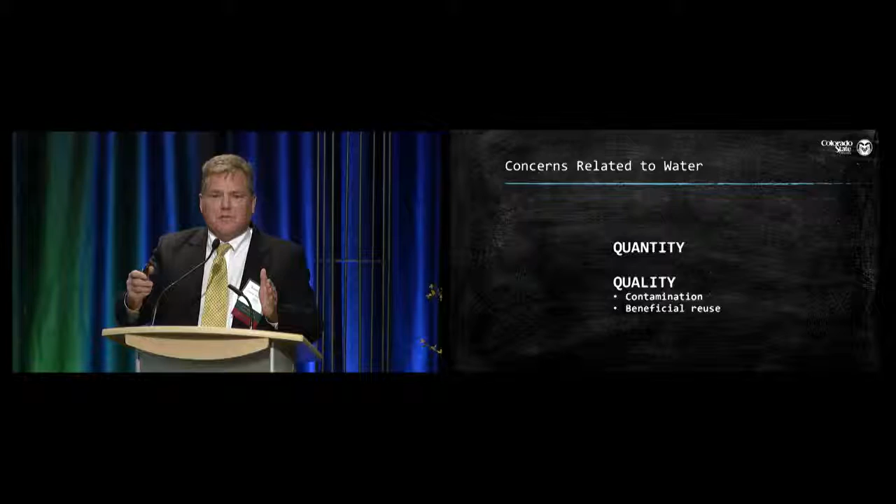But the other part of it that I think is very valuable, and we're putting a lot of effort in - and Joe will talk about this - is reusing the water. A lot of the flowback, which is the early water, versus the produced water, which I think was discussed earlier - Rebecca talked about it, that it's produced in tandem with gas and oil. A lot of it is deep well injected right now, and there's a pretty big push to not do that as much, to make beneficial use of the water, and I will talk about that.

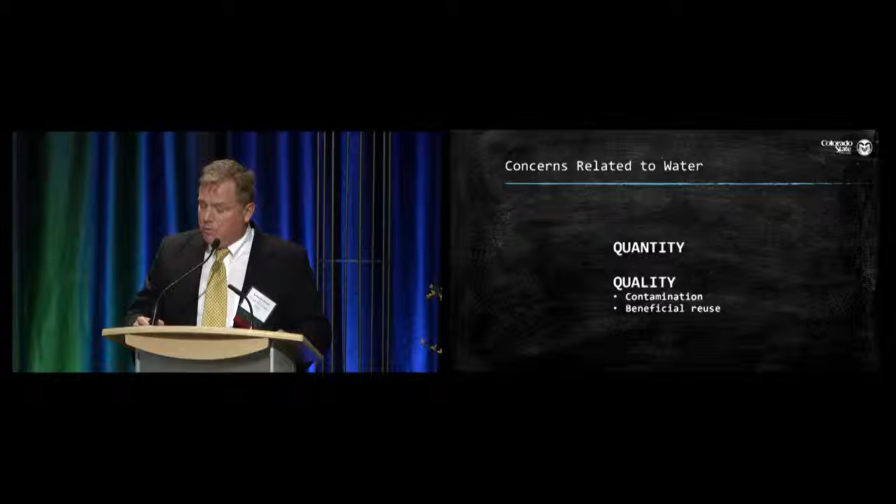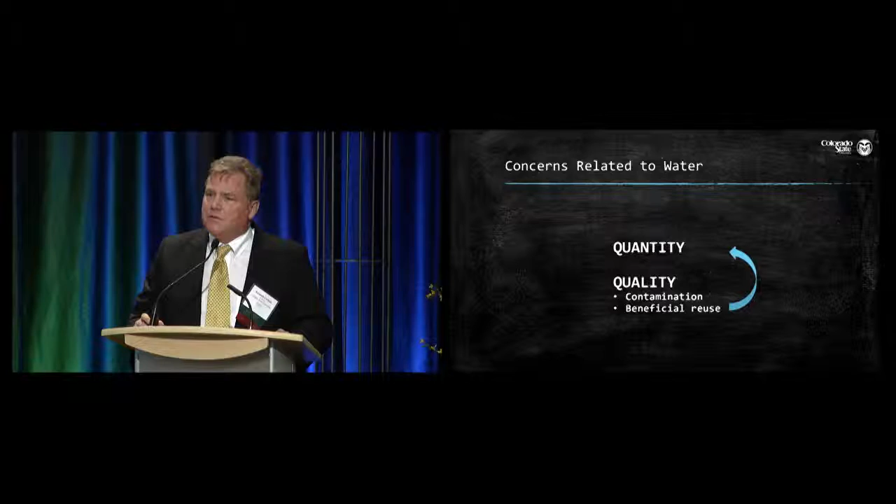And of course, if we do that, that impacts quantity, right? If we can reuse some of the water, the oil field wastewater, then we don't need as much fresh water.

I put this slide in here, and I'm not going to go through it in detail, but to remind everyone how interconnected things are - energy, water, and agriculture is what we're doing here. But agriculture can also be food, right?

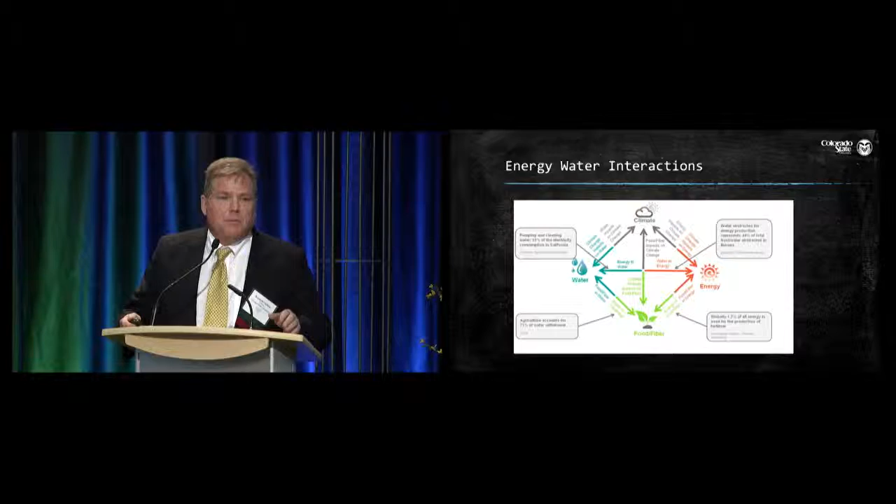We have always needed energy to produce water. In fact, one of the facts is that 20% of the electricity, the energy used in California, is for treating and transporting water. And you know, there's biofuels - there's a lot of linkages. So it's not as simple as just looking at water by itself and not including energy into that. And then recently, people have started to look at agriculture or food.

I think Rebecca cited this earlier, and so she did some of the work for me. Essentially, 0.1% - this was a study done by the Colorado Water Conservation Board, COGCC, and another organization that's eluding me right now. It says that 86% of the water is used for ag.

You can look at this in different ways. The truth is, what it says is that 86% of the water extracted is used for ag. But ag water is actually used multiple times - you irrigate, it goes through the alluvium, someone else claims the water downstream. So it's not completely apples to apples here.

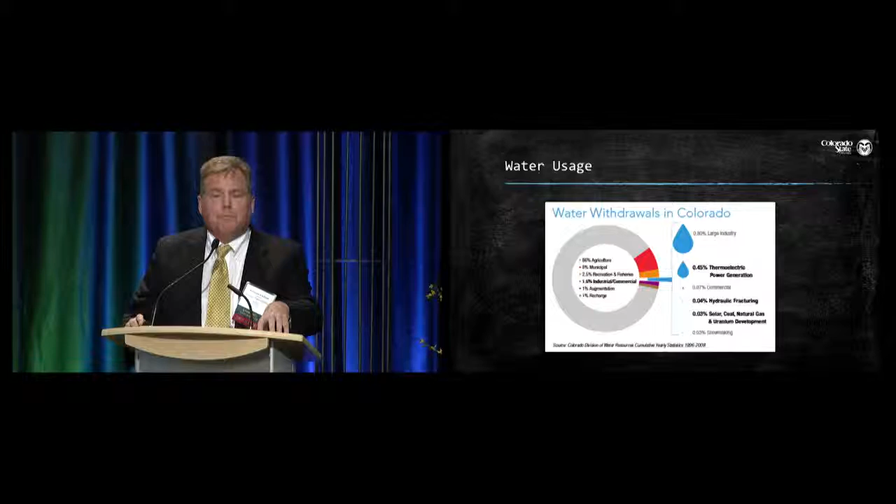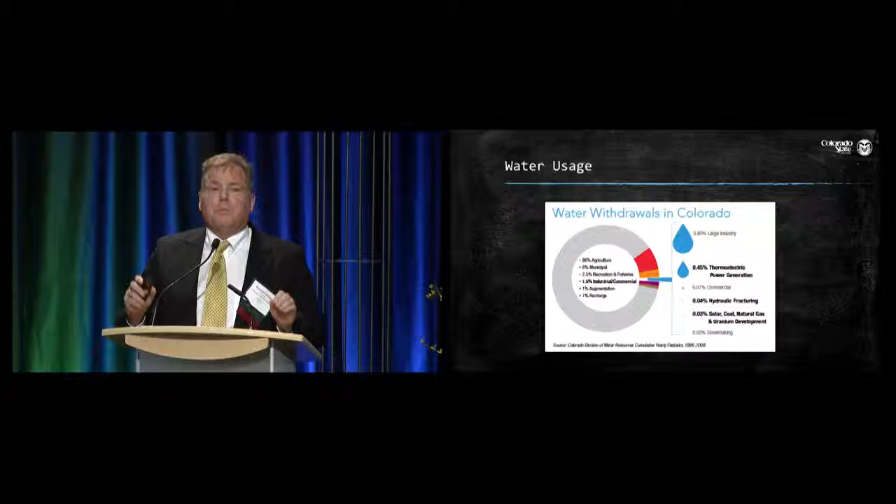And the other thing is, you have to take into account local issues - if I'm the farmer that has lost or been outbid on water that I was expecting for some other use, that doesn't make me feel better that less than 0.1% is used for hydraulic fracturing. I think Joe will talk about this too - it's still valuable. The water might be 0.1%, that's a number, but it's still a valuable resource, and a lot of effort's being put into reclaiming it.

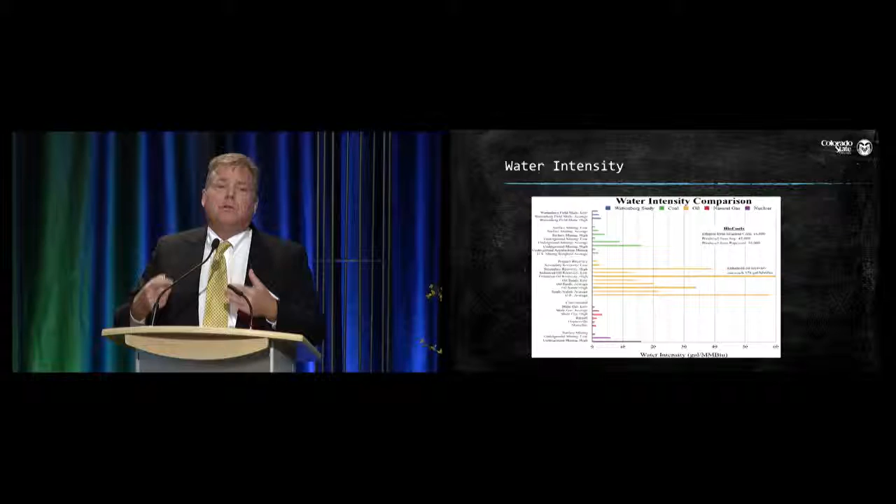I think this was covered also - this is actually the data we developed. We did this study about 3 or 4 years ago, published it, because at the time there was this discussion about 5 million gallons a well. Well, if you get more energy out of that, if you have to use less water per million BTU of energy that you reclaim, then it's probably a better deal - a more efficient use of the water. And by far the most inefficient use of water for energy is biofuels.

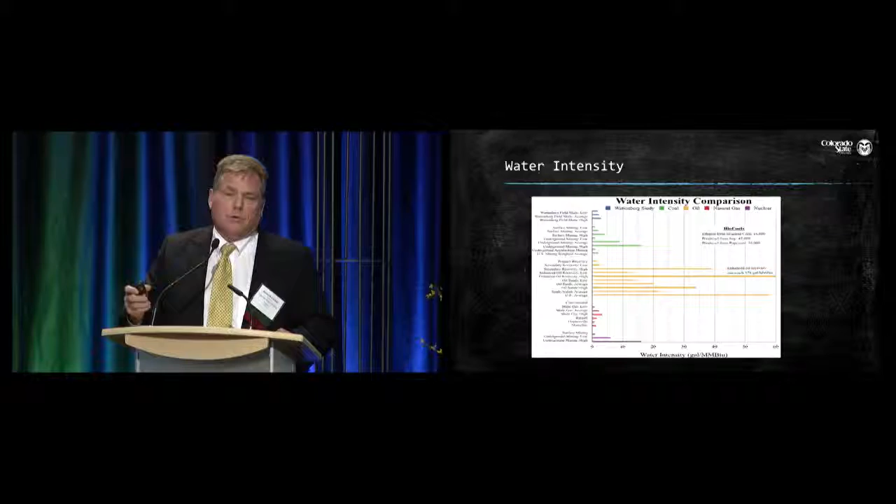First, there's freshwater acquisition, storage, and transportation. Acquisition, I think you understand - that could come from groundwater, from cities, from existing surface water rights. But storage and particularly transportation are really key aspects of the whole life cycle of water management.

Frac fluid interaction with recycled water - so if we're going to recycle water, that's one potential beneficial use for it, is to use it to frack another well. Depending on the frac fluid you're using, it might or might not be compatible with that water. So a lot more understanding needs to go into that.

Produced water management - this is the water that's come back. You've got the same sort of thing: you need to collect it, you need to store it, and you need to store it safely. And I think one of the things you maybe got from the air emissions section was that this could be a source of VOCs, possibly methane, but more VOCs.

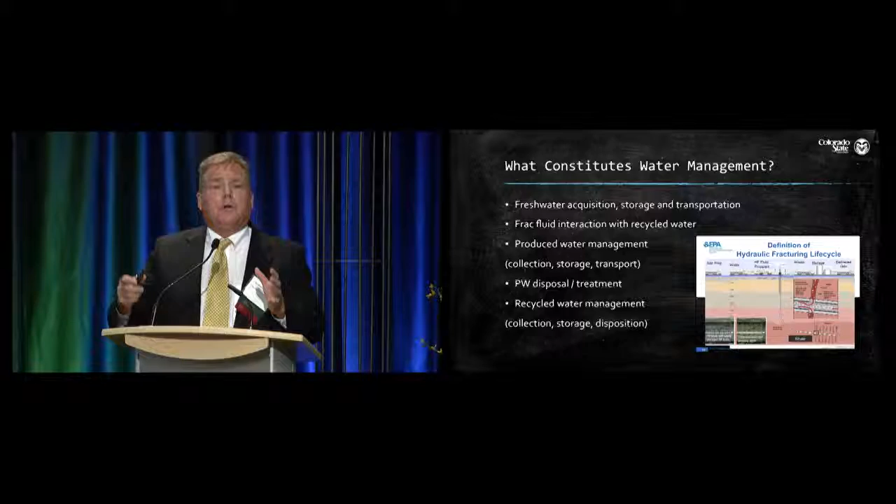Disposal or treatment, that's sort of the end. You're going to transport it somewhere, put it somewhere, or dispose of it so that it essentially ends up 10,000 feet down in a formation that you'll probably never use again. Or are we going to try to make beneficial use of it? And then there's recycled water management.

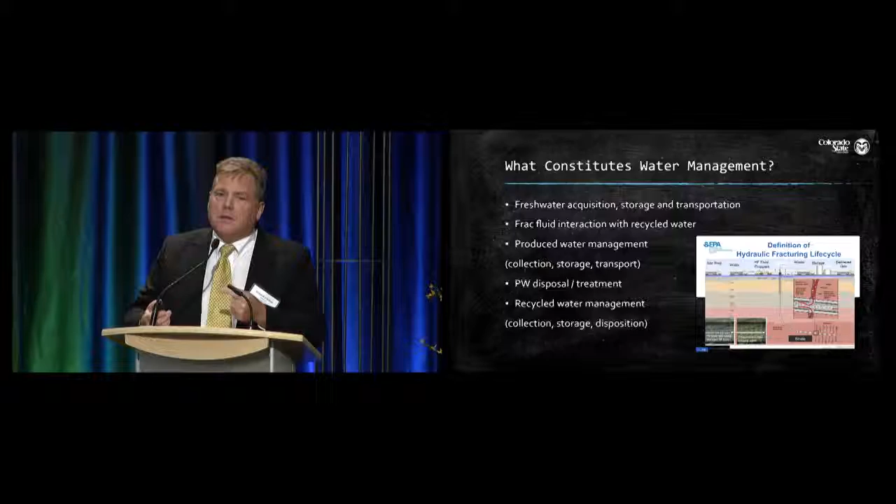So after you've taken it somewhere, let's say you choose the treatment option, you've still got to figure out how you're going to get it to this place of beneficial use. So you're back to the transportation problem. And if you throw trucking in, the costs go way up. So it's really a logistics issue.

Let me show this slide, I think it represents that. I'm not going to go into this in detail, but this is some modeling we've been doing over the last few years to try to isolate the individual variables that are important in this whole water management strategy. So there's things like the quality of the fresh water, the volume of the fresh water, the transportation costs, and then what's the water quality needed for fracking?

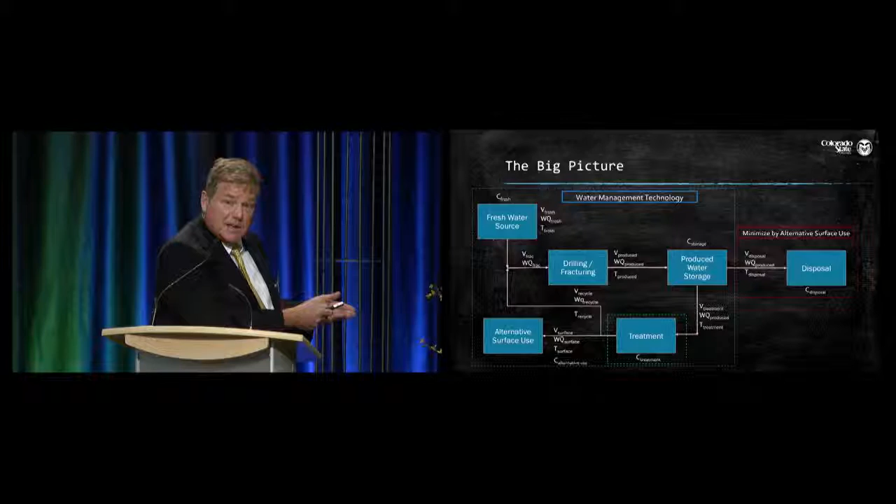It goes through drilling and fracturing. We need to store it. We then either send it to disposal, or if we choose treatment, we need to know the volume that we're going to get. We need to be able to predict volumes. We need to be able to predict what the water quality is that's coming into our treatment facility. And then we have to decide what's the best beneficial use.

Is it going to be an alternative surface use? And so what could that be? Well, that could be agriculture. That could be irrigation. That could be other industries that can use somewhat of an impaired water that are local. But when we run these models, the key is to minimize transportation, particularly trucking transportation, because that's where the cost is.

So I like to think of this as, what would be best? If we could just go from where we are now to the ultimate solution, what would we like to see? Well, what we'd like to see is, we have an oil field here, it's producing water, we're collecting it in a tank, it's bermed.

It's contained, so there aren't going to be spills. And then it's treated on site cost effectively. Has to be cost effective. And then there is a beneficial use for the water in the proximity of where the water was generated. And so in this sort of ideal picture, I would say it's maybe used for irrigation, or maybe put in a stream for downstream use.

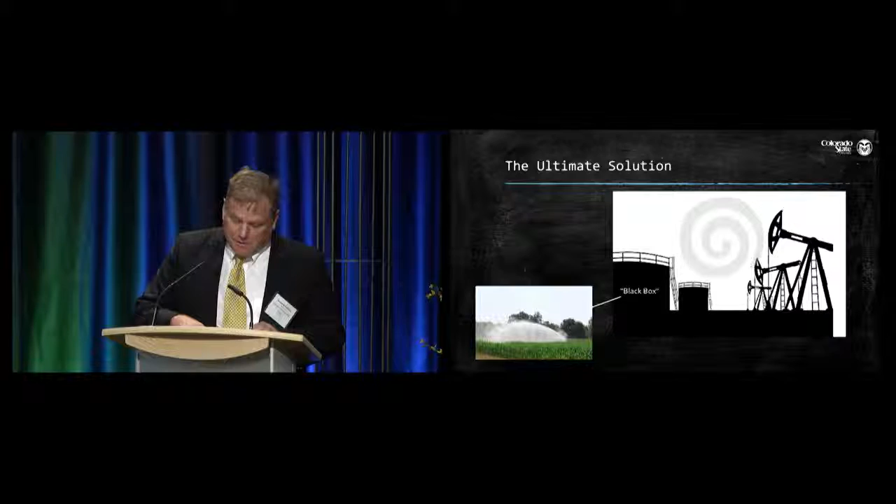Now, we're not there, okay, but that is where I think a lot of people in industry I talk to are headed, and particularly with lower oil prices, this is a very cost-sensitive thing. So the challenge to engineers and researchers is to drive the cost down for the logistics of getting this kind of solution accomplished.

This is the same plot again, and we're talking about some of these. I was going to mention the treatment box here. So leading into treatment, we need to know how much water is being produced. I don't know whether everybody's aware of this, but this is a typical decline curve, or type curve, of both oil and water. And they don't necessarily have the same slope, but they have the same shape.

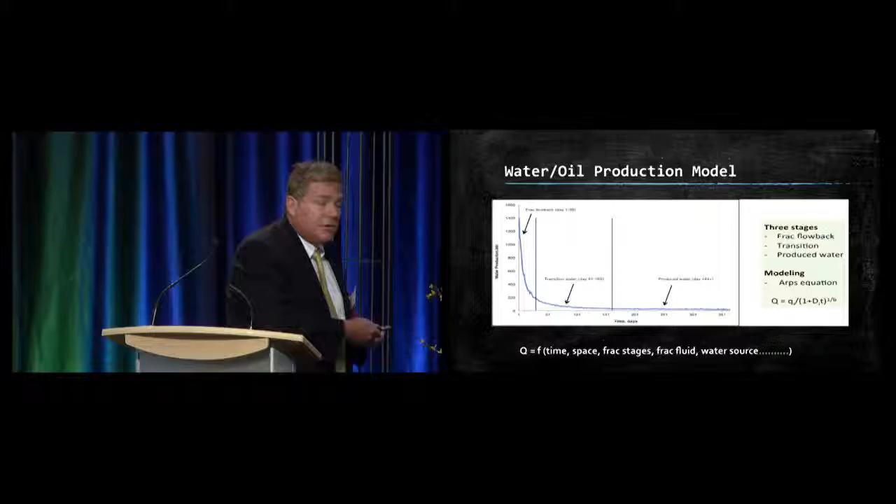And that means wells fracked, opened up, 1,400 barrels a day. This is real data, I think from about 80 wells averaged together in a field of a local operator we were working with. So day one, 1,400 barrels a day. By day 100, maybe 20 barrels a day. So that's one of the challenges you're dealing with.

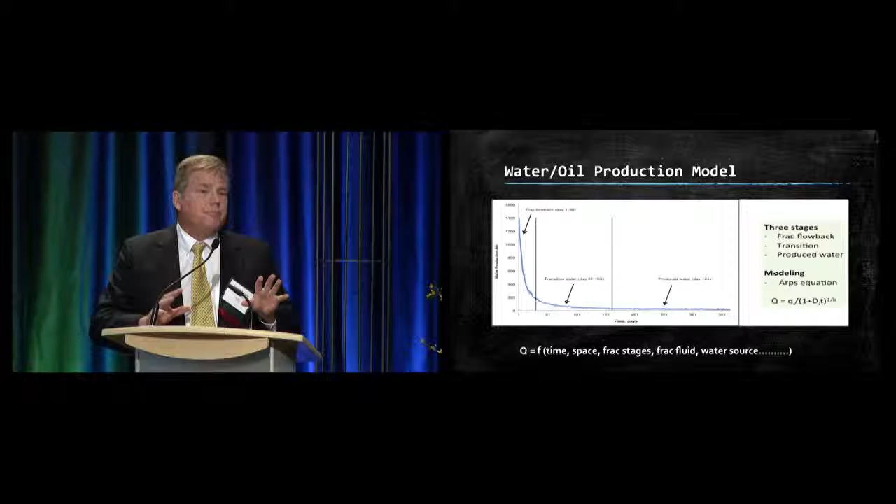If I have a fixed facility, a wastewater treatment plant, I pretty much know what the volumes are, and they're pretty constant. Plus, I have an infrastructure that's bringing the water to me, and all I have to worry about is the treatment facility itself. I don't have to worry about all the other logistics.

And here's the other thing that makes this challenge even more difficult: the spatially dispersed nature of the wastewater source itself. So again, back to this domestic wastewater plant in Fort Collins or your city, there's infrastructure in place, a collection system that brings the wastewater to the treatment plant. The treatment plant's usually on a river or some other lake, or some other discharge point, so they don't need to transport it. All the effort goes into the treatment itself.

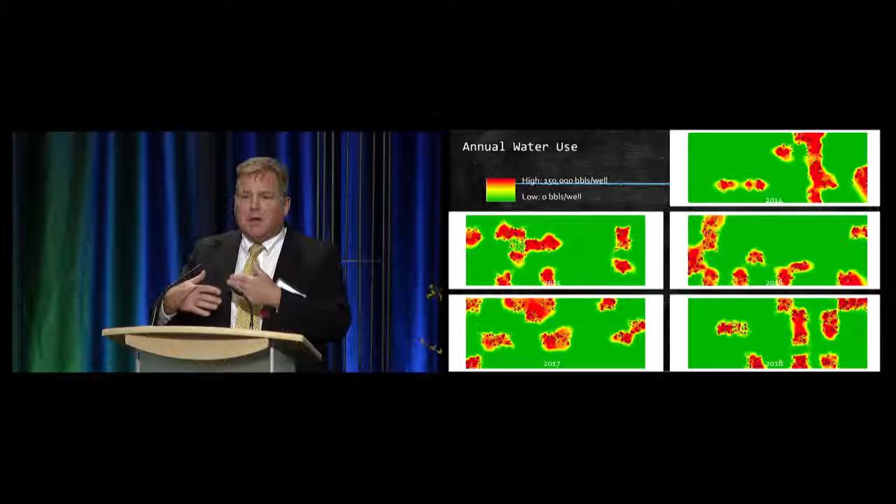This is a real development plan, which becomes obsolete pretty quickly because of changing conditions and prices, etc. But this shows over a 5-year period where the water would be needed, and it goes from about 150,000 barrels per well to zero.

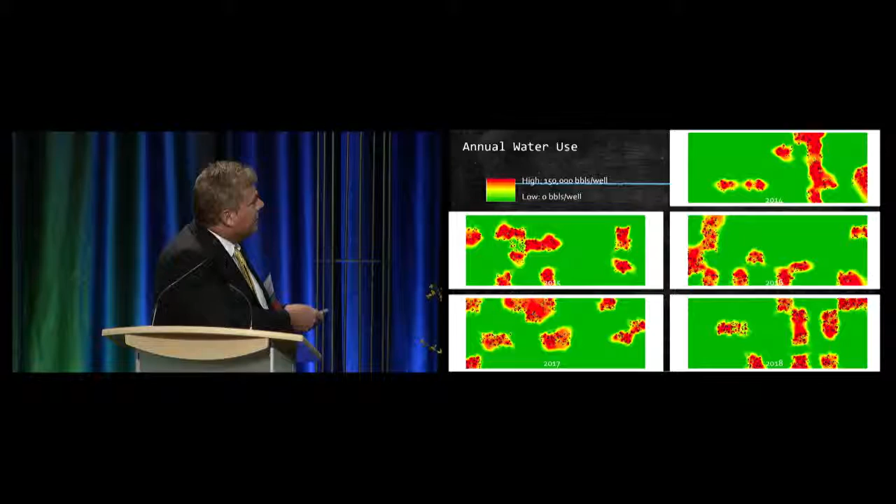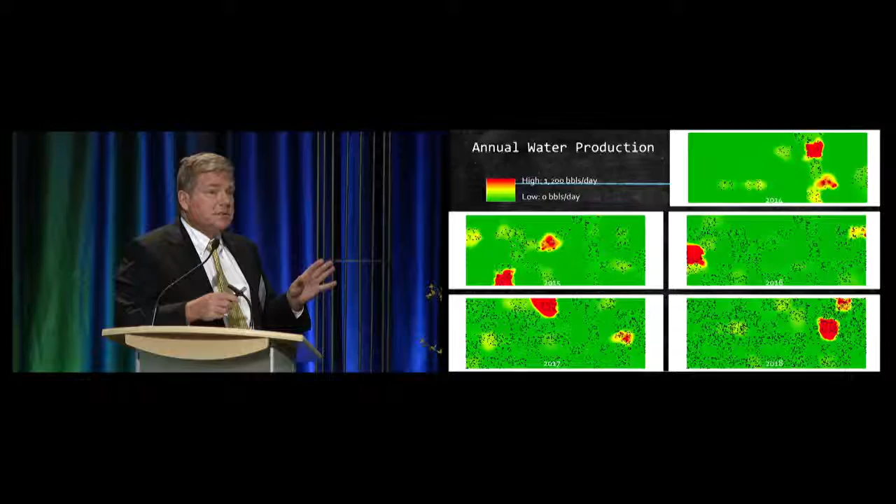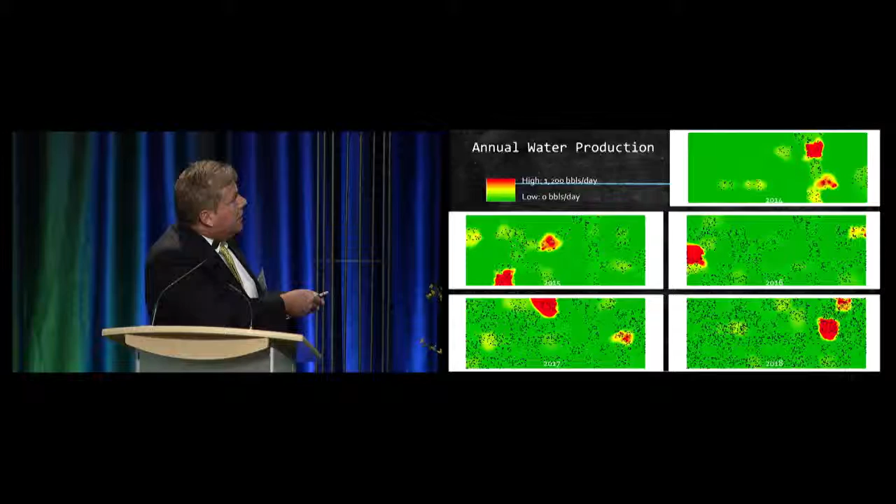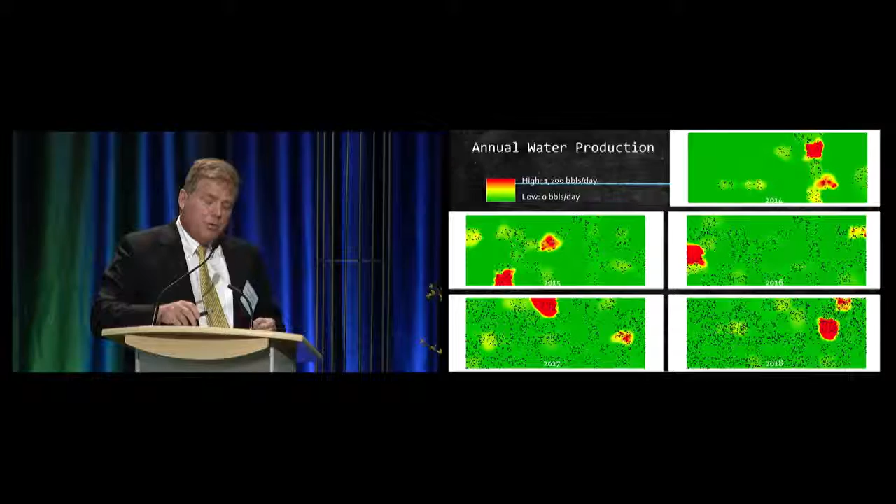So there's a spatial challenge here in terms of getting the water. If we're going to recycle it for fracking, this would be one of the challenges. But here's another way of looking at it: where's the water coming from? This is actual development plan data from a few years ago, showing how they were planning to develop the field. In this year, there would be a lot of water produced here, but not necessarily a lot of water demand there, right? The water demand might have been down here. So how is it done right now? It's trucked, and trucking is expensive and damaging to the community. So this spatial logistics issue is pretty significant. How do we treat the water and then distribute it locally such that we don't have to incur many transportation costs?

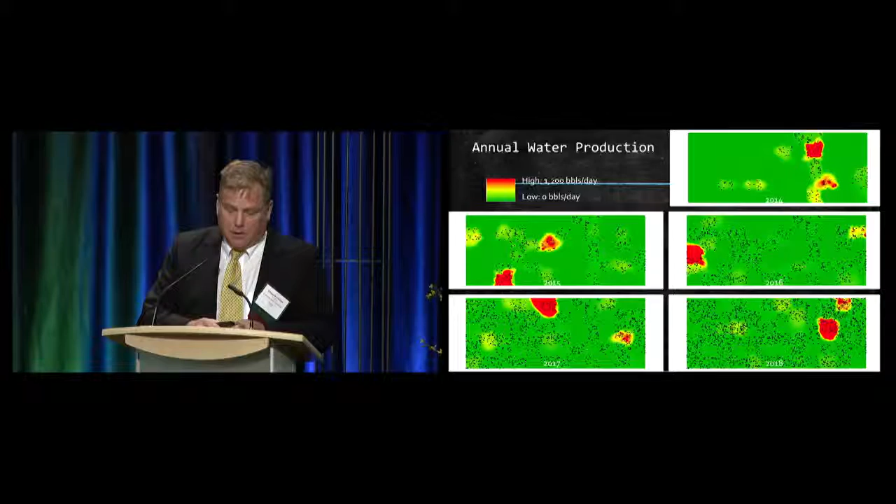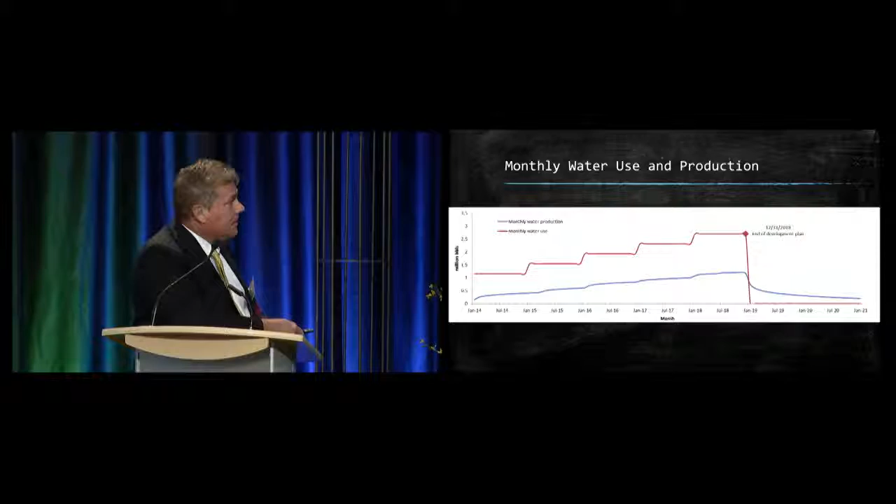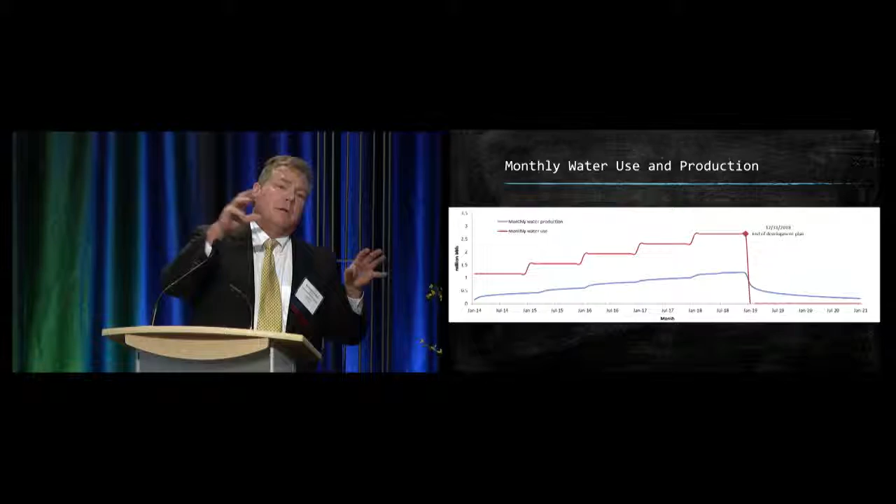The other thing I was trying to point out is when the drilling stops, goes to zero, the water continues. Now it is declining, but the water is still there. This is what's happening in several parts of the country where drilling has slowed way down, but the water keeps coming. So what are we going to do with it? We can't recycle it for fracking, so we're going to have to find something else to do with it.

All right, so quickly I'm going to go through some treatment process type concepts. You need to know what your quality is, right? There's metals, there's BTEX, there's organic matter, there's stuff. I try to tell people that the naturally produced water is a pretty nasty thing.

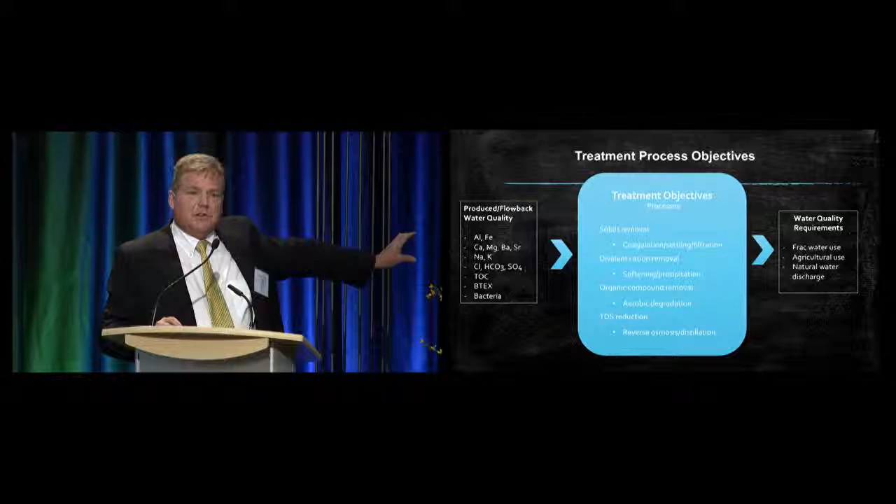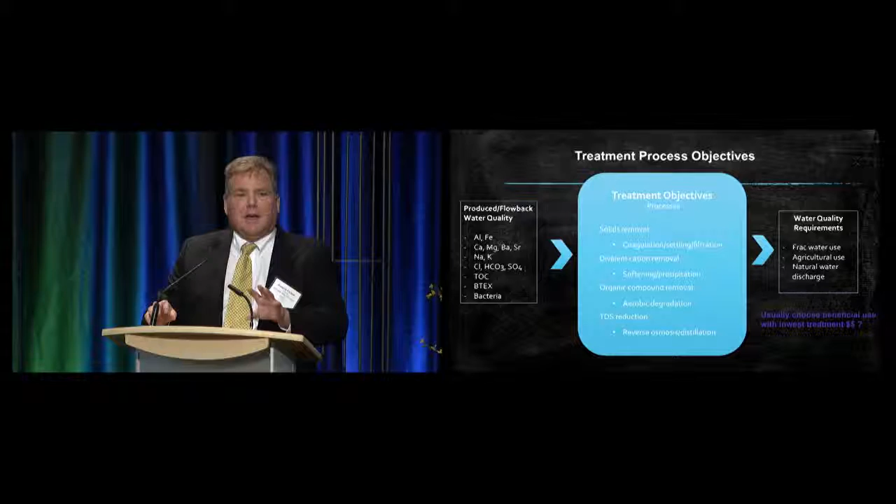Probably the least amount of treatment would go toward using it to frack another well. If you're going to use it for ag, maybe that's not quite as stringent as discharge. If you're discharging it to a water of the U.S., it's pretty stringent. And that controls the level of treatment you're going to have to provide, and of course that controls the cost. The last one there, salt removal or TDS reduction, is the most expensive, so that's sort of the tough one. You'd be driven, if we had this nice model we're trying to develop that could predict all these things, to give an operator guidance: okay, I'm going to send this water today to this use because it allows me to treat it minimally and still beneficially reuse it. That's what we're trying to get at.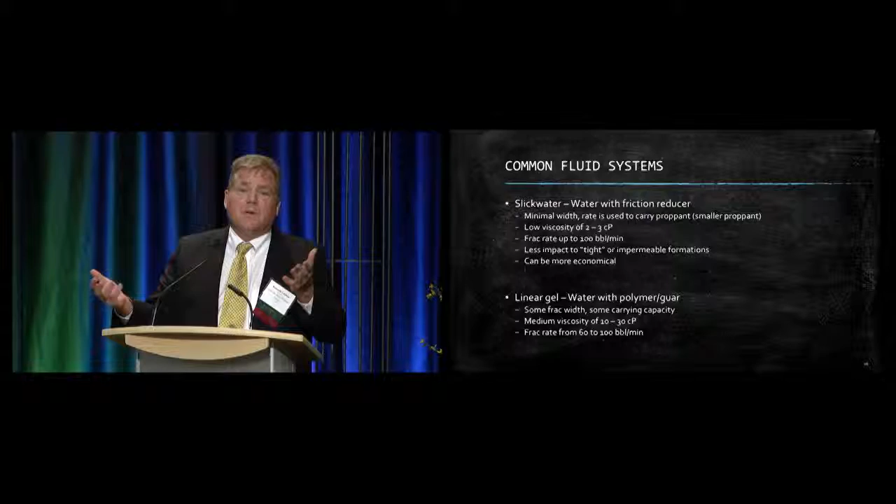So very quickly, there was a little bit of discussion about gels versus not gels. You use gels when you need the viscosity, but the gels create a tremendous amount of organic matter. Here we're looking at slick water, which, as Rebecca described, is essentially just friction reduction, and the organic matter load is relatively low. If we go to a cross-linked gel, which a lot of operators in the DJ are using, and I think Anadarko periodically does too, as she said.

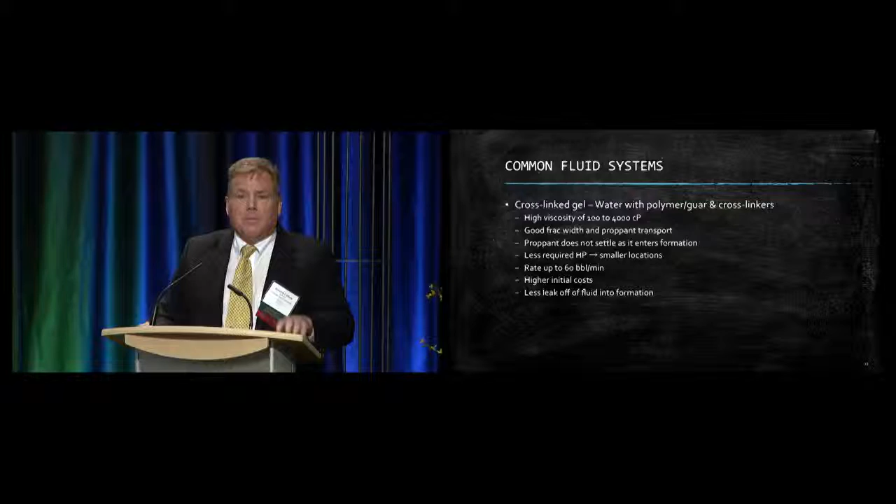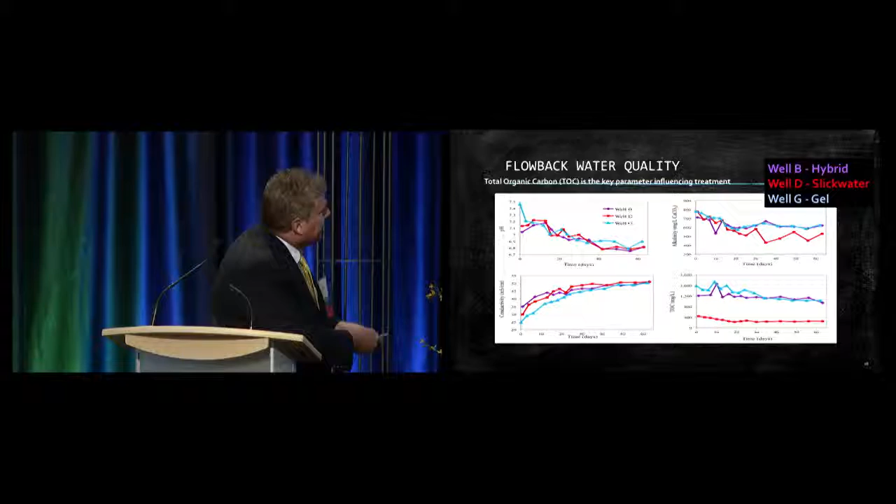So you're looking at a much higher viscosity, and this is real data that shows the difference. We actually had the opportunity to track the water quality for an operator near Denver that was doing slick water on one part of the pad and gel frac on the other part. pH, alkalinity, conductivity were pretty close, but look at the difference in organic matter, much less. So it's easier to treat. The ability to recycle water is going to be dependent on the frac fluid that's used.

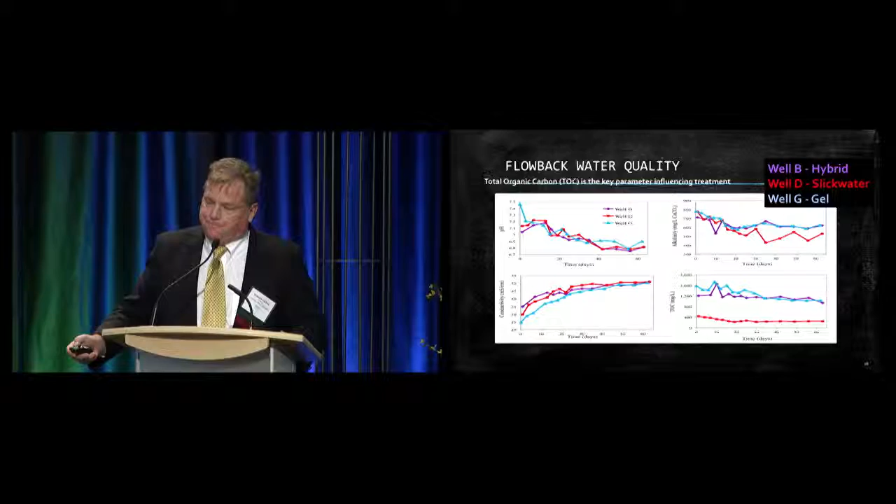Okay, I'm going to skip that because I see Maury getting up.

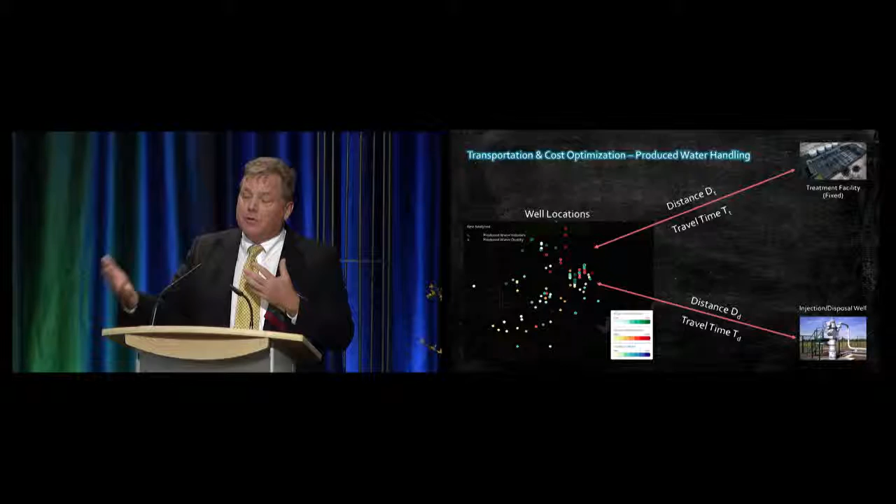I'm just trying to reemphasize the importance of understanding the travel times, the well locations, the disposition of the water, what you're going to do with it, and it lends itself to a systems-type model pretty readily.

So I want to get to groundwater contamination for just the last 2 or 3 slides. We have done a fair amount with this, and I think it's been discussed. We see 3 mechanisms for groundwater contamination, one being surface activity.

If it's an unconfined aquifer, meaning there's no impermeable barrier between the surface and the aquifer, then it's subject to all surface activity. And that includes oil and gas, so potentially spills.

Another is an actual casing breach, and that's what this would be. And I think the whole idea of casing was covered pretty well.

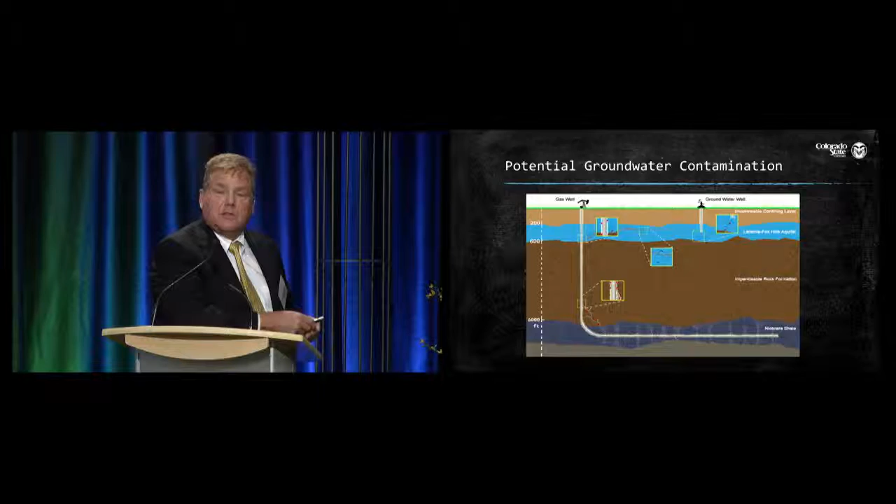And then the third would be maybe an inadequate cement bond with the formation, or maybe with the casing itself, allowing stray gas from the formation to go all the way up into the aquifer. And so those are really the three mechanisms that we believe exist.

And we've done some studies with COGCC, published a few papers on the presence in the Wattenberg. I'm not going to go through this because she did, but 3 layers of cement, 3 layers of steel casing.

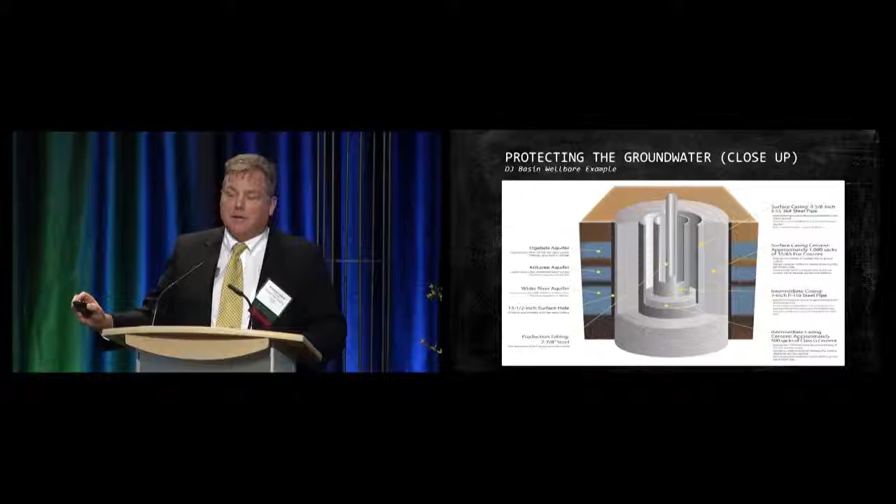This I think is the last slide, and this was from a paper we published recently about methane contamination of groundwater in the Wattenberg and in the DJ Basin. And I guess the point I want to make here is, and the reason we did this was...

largely because the Flaming Faucet in Gasland was filmed in Fort Lupton, and there was a little bit of misunderstanding there on what was actually going on. It was biogenic methane, and biogenic methane has been present in the DJ for a very long time, and people have known that. So we characterized how much methane there is and what the sources were.

And the answer is yes, there is methane in the groundwater. There's coal seams underneath the Laramie Fox Hills aquifer, so that's not that surprising. But there were a few cases of thermogenic methane, meaning likely from an oil and gas operation. COGCC investigates those rigorously, tries to figure out what went wrong and seal the wells, etc.

My own opinion is that they've been drilling in the Wattenberg for 40 plus years, and the casing requirements now are so much more stringent than they were even 10, 20, or 30 years ago, that when we do see this stray gas, it's likely from an older well, a legacy well.